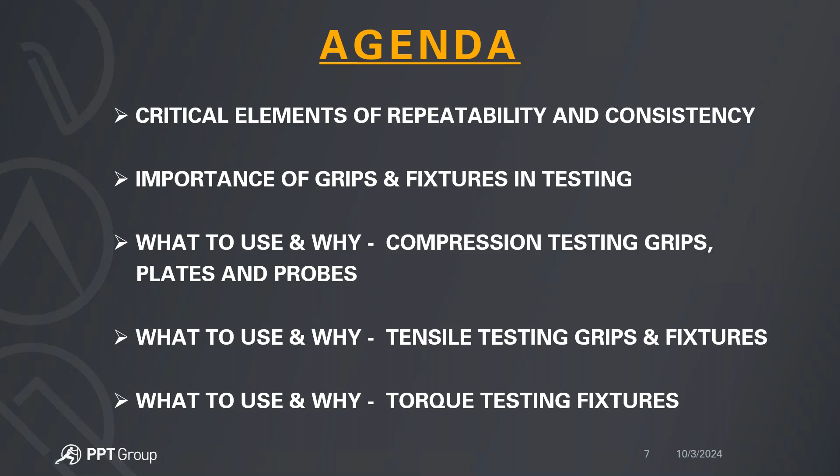So our agenda for today will be quite simple. We'll look at some of the critical elements of repeatability and consistency. We know the selection of grips and fixtures play a crucial role in establishing a consistent and repeatable testing environment, so we'll look at what some of those elements are. And then obviously the importance of grips and fixtures in testing in general. And then we'll hone in on what to use and why for compression, for tensile, and for torque testing.

So the key factors that are usually required for any consistent and repeatable testing environment are obviously defining a testing objective. As in, why are you even testing a product at all? What are you looking for? Obviously, without a destination, you're not going anywhere, right? So we need an objective, why that test is being performed. And then establishing a testing standard requirement, or how do you go about meeting that objective?

So let's just say we're looking for the compressive strength of a container. We've defined the objective. How do we go about compressing that? Is there an existing ASTM or ISO standard that gives you a guide on the types of fixtures to use, sample preparation, the testing environment, the speed of the test, what kind of data to include in the calculations, and so on? Or is it just an in-house standard where you're establishing your own testing parameters? And then once those questions are answered, the next step is to determine the appropriate testing equipment to use.

Are we using a handheld unit? Is it going to be a simple motorized unit, or a computer controlled unit? Depending on the sophistication of the testing application, you can determine what type of equipment to use. Other factors that go into that selection are how much force is being applied in the test, how much elongation is expected, and things like that.

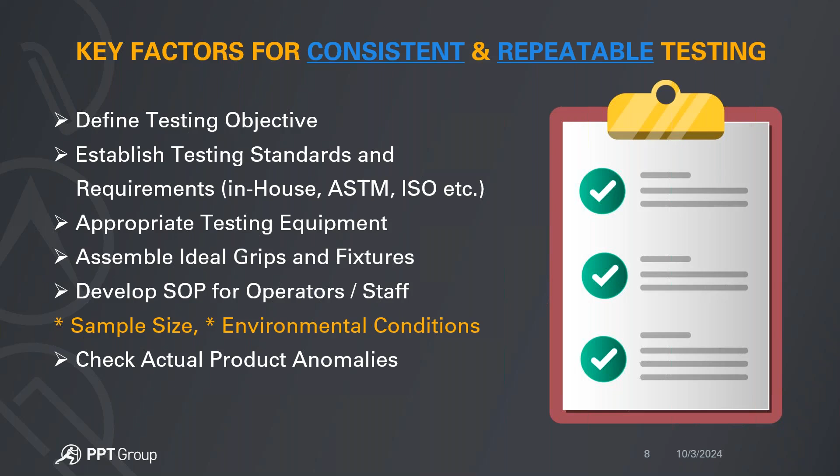So in all of these, as I said, any one of these can be its own webinar, but we'll focus primarily on number 4, which is the ideal grips and fixtures and how important they are to establishing a consistent and repeatable testing environment. So how important are these fixtures and grips to your testing, whether it's compression testing, tensile testing, or torque testing?

So we'll start with accuracy. The right grips and fixtures can minimize variations and inaccuracies in your testing measurements. For example, if you have a 6-inch wide sample, it wouldn't make sense using a 4-inch wide grip to grip it, because you have the overhang, which might affect the actual accuracy in your testing. Or if you're testing film and you're gripping it with serrated jaws, those jaws might bite into the film, and so the tear or the break happens at the point of contact, not necessarily in the middle where you expect it to be.

So again, selecting the ideal grips is critically important. And once you find the right grip, you're enhancing the repeatability. If it's the right grip, then as long as the operators are fixturing the samples the exact same way, you should see some consistency in the test results, as in the test being repeatable. Gripping the sample correctly is essential for test repeatability.

Ease of use is a factor we usually don't really consider. We don't want the operator with the biggest forearms to be the only one able to fixture a certain sample correctly. We want the ideal grip to lend itself to ease of use, regardless of who the operator is. Again, it's all in the SOPs; if everyone's doing the exact same thing at all times, then we shouldn't have one operator over-tightening and another under-tightening. If that is a problem, you probably should go with a lever-operated or pneumatic style grip, which will ensure all operators are fixturing those grips the exact same way.

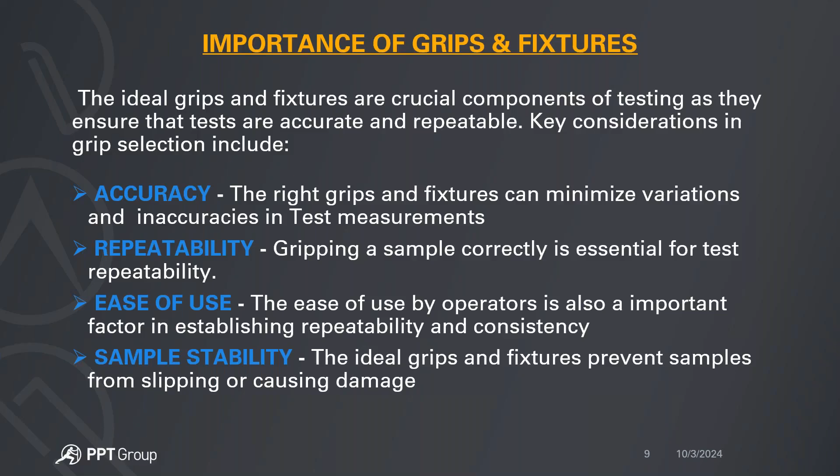So these are the important factors that go into the role that grips and fixtures play in your testing application. We'll take a quick look at some of the commonly used grips and fixtures in compression testing. As I mentioned previously, these usually warrant a whole webinar on their own, where we delve into the types of compressive testing and what to use and why. But this is going to be more of a cursory, general, introductory look.

Compression or push testing usually can be either destructive or non-destructive testing. It essentially measures force resistance when you compress to a known deflection or displacement.

So these are the three types of tests you usually see in a compressive test, where you compress to say 2 inches and then measure the maximum force resistance, or you can measure the deflection when a specific force is applied. So if you wanted to test a spring and know how much that spring deflected under say 20 pounds of load, that would be one of the objectives of a compression test.

Then there are other instances where you can just run until the sample breaks or fails, and measure one or both of two things: either the force at break or the deflection at break, or both. So you're measuring the sample's yield or point of deformation or failure, in addition to break and/or deflection.

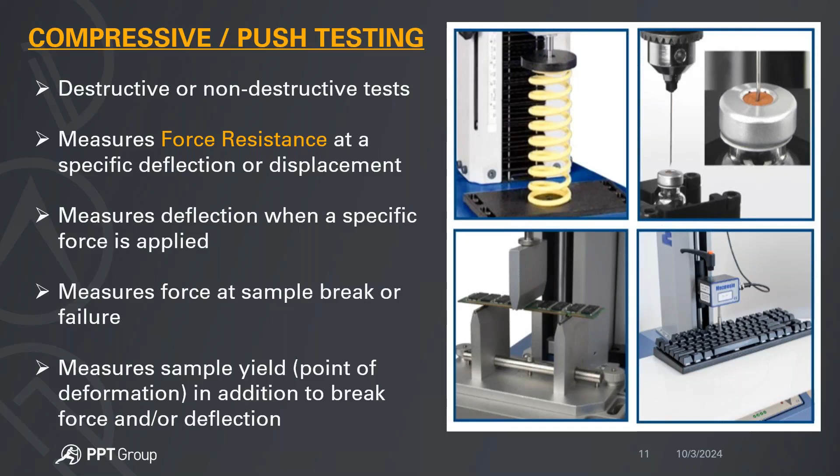So what are some of the grips and fixtures used in these applications? We'll start first and foremost with typical top load or crush testing. These involve compression plates, or you might hear the term platen used every now and then. These come in different sizes and materials, and can be round, square, or rectangular depending on the type of samples being compressed. They can also be rubber-faced.

Rubber-faced compression plates prevent slippage, especially when you're compressing really smooth samples, because anytime that plate slips, it might create a certain anomaly in the test result, which is undesired.

You can also have self-leveling or cone-pointed types of compression plates. Self-leveling is kind of self-explanatory - if you have uneven surfaces, a self-leveling compression plate is usually ideal. The cone point is if you have samples where you need that cone to enter the opening of the container and also let air out so you're not building up pressure in that bottle. That would be ideal as well.

Some of the test applications you might see using round, square, rectangular, vented or non-vented compression platens would be top load testing. You'd find top load testing in blow molding or other containers, whether it's aluminum containers, cans, plastics, and so on. Also burst or break testing, and push out testing - these are all the common applications where you would essentially identify these types of compression plates.

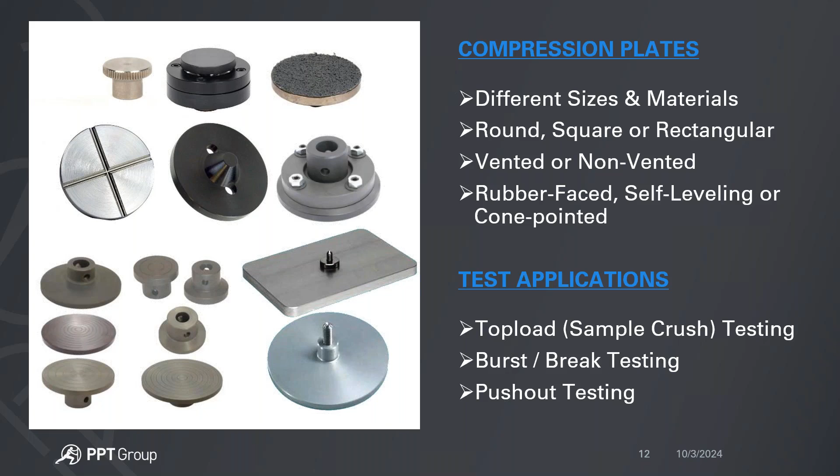There are also compression probes that are more specific, for when you want to pinpoint specific areas instead of compressing general areas. For general areas, that's when you would use a plate. The probes perform a similar role, but slightly different.

Imagine if you had to test the keys on a computer keyboard - a compression plate might be touching several keys at once. So using one of these more dedicated probes would allow you to concentrate on just one key at a time.

Or if you had to do a needle puncture test, if you had to puncture leather, rubber, or textile, then a sharp tip probe would be more ideal for that testing application. If you had to do a burst test through plastic or paper, then the radius or round ball probes would also be more ideal.

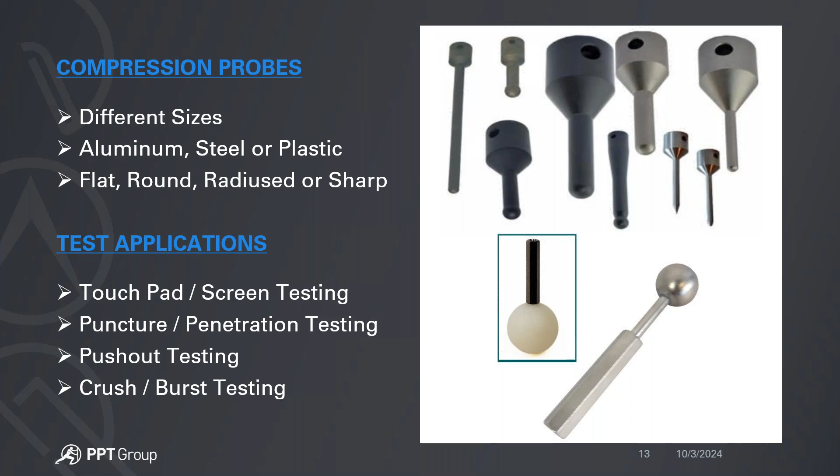Next, there are also certain custom applications. These are usually not simply off the shelf, but customized to meet specific testing standards, or maybe just because of the sample size, simply hanging a compression plate on a load cell might be a little too much.

You can have round, square, or rectangular fixtures. You could also have static ones, meaning more dedicated, and quick change adapters that allow you to change between fixtures relatively quickly. If you had different sizes of boxes to test, you could keep the same base plate and change the top sizes. Custom test applications include carton crush testing, glass break testing, and touch actuation testing.

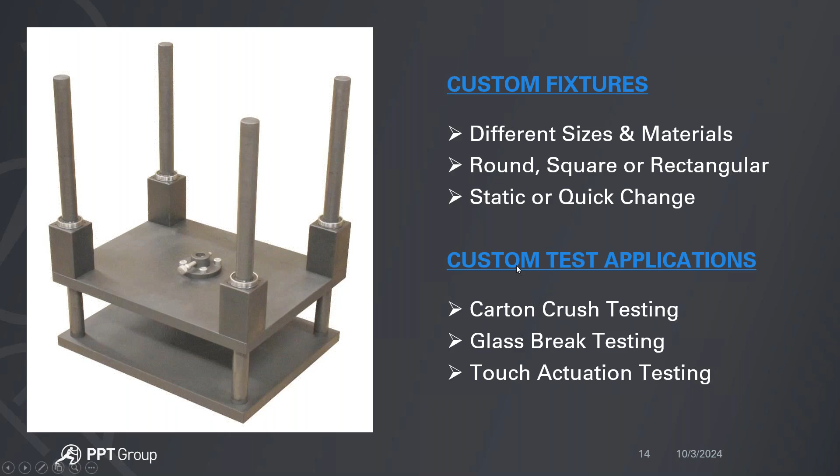All right, so types of grips and fixtures in tensile or pull testing. This is a whole webinar on its own, but we'll look at some factors or features of tensile testing. These can be destructive or non-destructive testing that measures forces at a specific displacement, or measures displacement or deflection when a specific force is applied, and also measures the force when the sample fails or breaks, or the point of deformation.

In certain force testing applications, running to a tensile displacement and measuring the force is common, or applying a specific tensile load and then measuring the stretch. But when testing materials, there are usually additional calculations like the yield point of deformation, elongation, and other calculations like Poisson's ratio or modulus of elasticity. Regardless of the testing application requirements, whether an in-house standard, ASTM standard, or ISO standard, the grips and fixtures will always be pretty much the same.

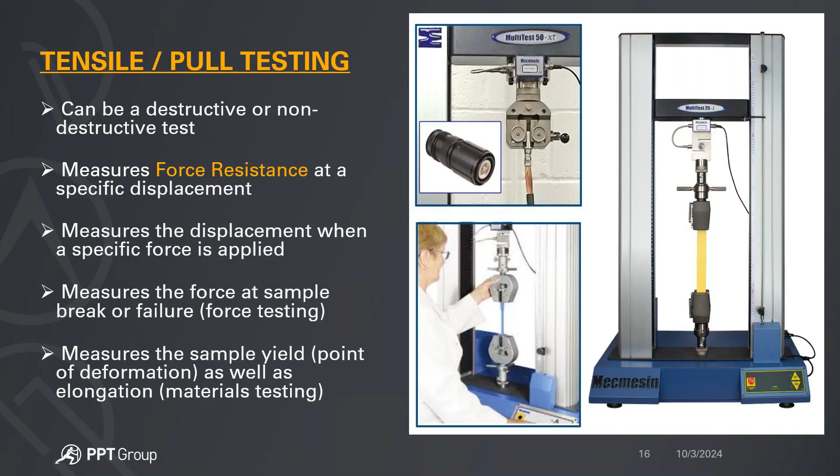So a quick look at some grips and fixtures. The most commonly used grips and fixtures in tensile testing are wedge grips. What's the allure of wedge grips? The grips are lever operated or capstan operated, but they're mostly spring loaded, and the jaws tighten as you pull on the sample. This addresses one of the important factors of grip selection, which is preventing the sample from slipping as you apply any kind of load, in this case tensile load.

So lever operated, spring loaded, or wedge grips are commonly used, or the capstan, where you have that wheel turn, is also commonly used, especially in tensile applications that require slightly higher rates of force.

Now these come in different sizes and capacities, depending on a few things: what the sample width and thickness is, as well as how much force is required in the testing application. These can be aluminum or steel, and one added advantage is you can have multiple jaw faces depending on the sample material - is it leather, rubber, textile, metal, soft aluminum, paper, or film?

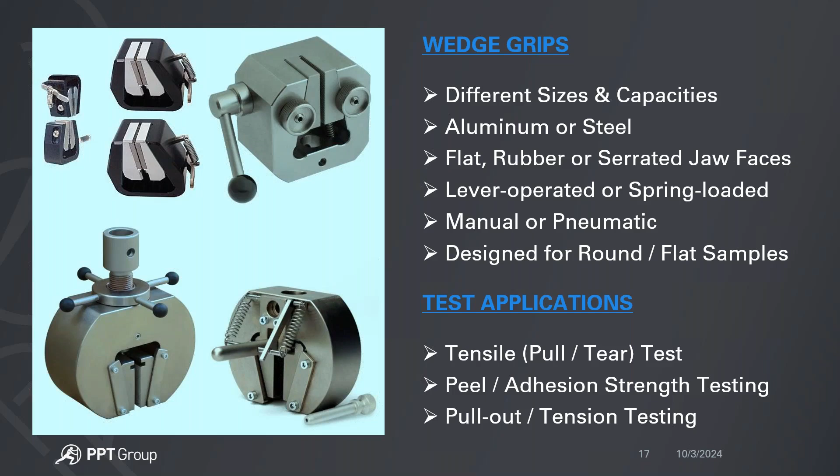Anything more than that, if you had to test a sample that's about 4 to 6 inches wide, then you might want to be looking at Vise grips. Vise grips also come in different sizes and capacities depending on the application requirements and the type of product you're testing. Again, they can be aluminum or steel.

Are you testing flat, using rubber faces, serrated faces, or even wave faces? Imagine if you had to test a piece of textile or fabric. There are these wavy kind of jaws that interlink, so when you put your fabric in it, it interlocks the fabric and concentrates the breaking force to the middle, which is where you want it to be. These can be used for both narrow and wide samples, and I've seen samples go as far as 8 inches in width, which is something that wedge grips cannot accommodate.

You can also find Vise grips in either manually operated lever or dual screw, or they can be pneumatic, as in air controlled, especially where you need to really clamp these products and prevent them from slipping while under load. Vise grips are designed for both round and flat samples. Samples can be rigid or soft, but those will essentially determine the types of jaw faces you use in that testing application.

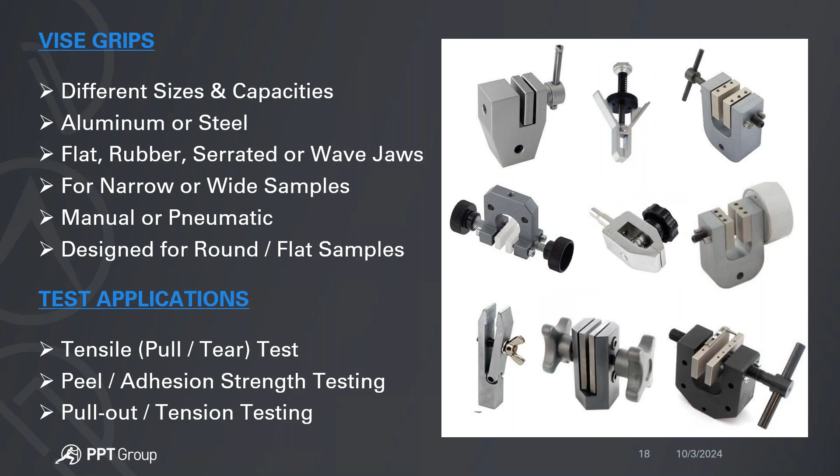Typical testing applications will also be tensile, pull or tear tests, peel and adhesion strength testing, pull out testing, shear testing, tensile shear testing, and so on.

There are other common tensile testing fixtures, things like test hooks that are very simple. If you bought a simple force gauge, more than likely in that carrying case you would have a simple test hook used for very simple pulling applications. Or you might have a flip cap hook, used on any products in your refrigerator with a flip cap. We call that a flip cap accessory or flip cap hook, used in testing the strength it takes to flip the cap to open and access a beverage, sauce, dressing, or what have you. And then there are cam grips, also used in different types of tensile testing.

There are bollard grips. Bollard grips are super cool, especially in yarn, rope, or wire testing, where they allow you to essentially wrap the wire around the bollard, which transfers the energy to the center, because you don't want the wires breaking at the point of contact where the jaws touch it. By wrapping it around the bollard, you transfer the energy to the center or middle of the sample, so it breaks right in the middle.

Then there are these crimp receptacles used in crimp strength testing on cables and wires. You could essentially have, on one grip, different sizes of cables, anywhere from 28 gauge down to 6 gauge, where you just rotate the center to get the right slot to accommodate the wire, in order to concentrate all the force on the actual crimp removal and not on the wire itself.

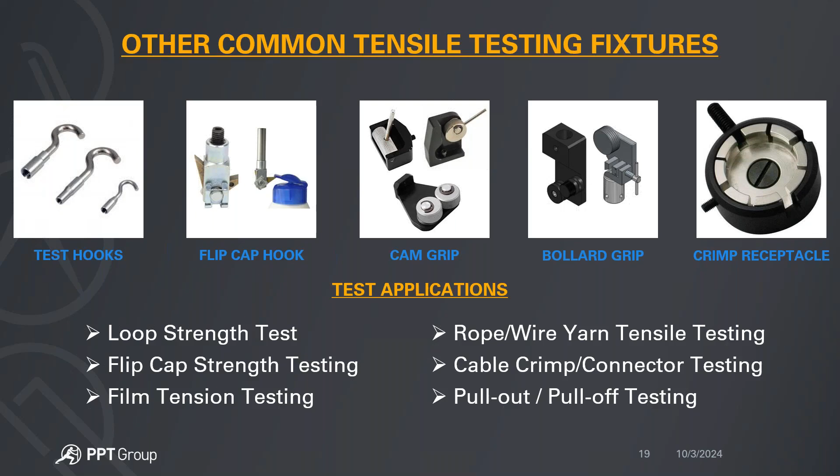It's one of the super fancy, cool fixtures we have. Think of a teddy bear eye on a plush toy or stuffed animal - one of the tests we perform is to see how strongly sewn on the eyes are on those plush animals. Essentially, to grip that simulates a child putting that button or eye in their mouth, and then testing the strength to make sure it doesn't become a choking hazard - so it's sewn on strong enough. By using this multi-jaw grip, it essentially forms around the button or the eye, and if you tighten that, it will grip it as if simulating gripping it between your upper and lower front teeth, and then pulling on that.

And then for applications that require really low or minimal force, or in instances where it's such a unique application that nothing off the shelf actually meets the requirement, we're able to generate 3D printed parts. One of the advantages of a 3D printed part is if it's a really low force testing application, you don't want to put a hunk of a grip or fixture on there, which exerts too much force on the load cell. So a 3D printed part allows you to use lighter material while still not deviating from the accuracy of the testing application.

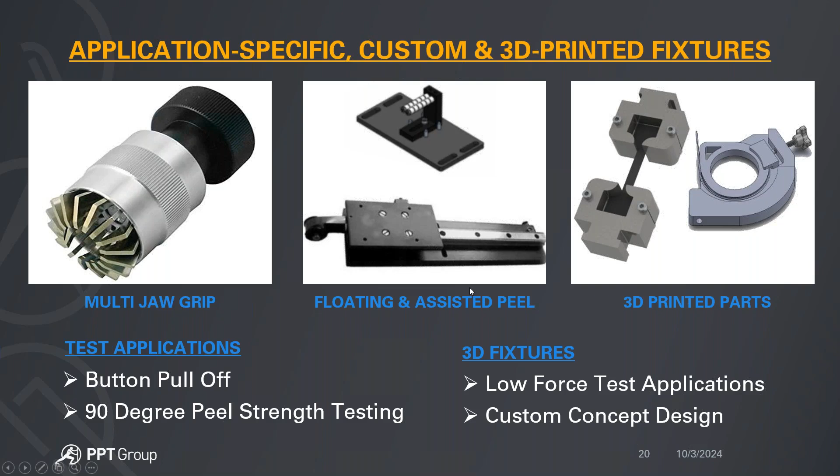So they're 3D printed parts, either for low force applications or for custom applications for which there's nothing off the shelf that actually meets the standards, or for really sophisticated custom concept designs and so on. So I know sometimes we encounter, hey, look, when I was going through your grips and accessories here, this is the product we're testing, and I can't seem to find any grip or fixture that meets that. Not to worry, we always do custom grips and fixtures all the time. So these are some of the different types of tensile testing fixtures that you would encounter.

Our next part here is our closure torque testing. Now, every time I use the word closure torque, or anytime our industry mentions torque, I know if you're a car enthusiast, the first thing that comes to mind is torque, like vehicle torque. So I'm going to disabuse your mind of that.

So for us, torque is essentially going to be either a static or reaction torque. And it comes with anything that turns, whether you're turning it clockwise or counterclockwise. Static torque, as in how much torque it takes to remove a cap off of your bottle, or reaction torque, how much torque resistance there is in spinning a fan, and so on.

Now, the different torque types that you would see would be a static or reaction torque, which involves a slow rotational rate of speed. For instance, the amount of torque it takes to turn your wipers on using the switch mounted on your steering column. Whereas the rotational or rotary or dynamic torque involves the motor that actually controls the wipers, or your roll-up windows, or your fan and so on, which would be more a faster continuous rotational rate of speed.

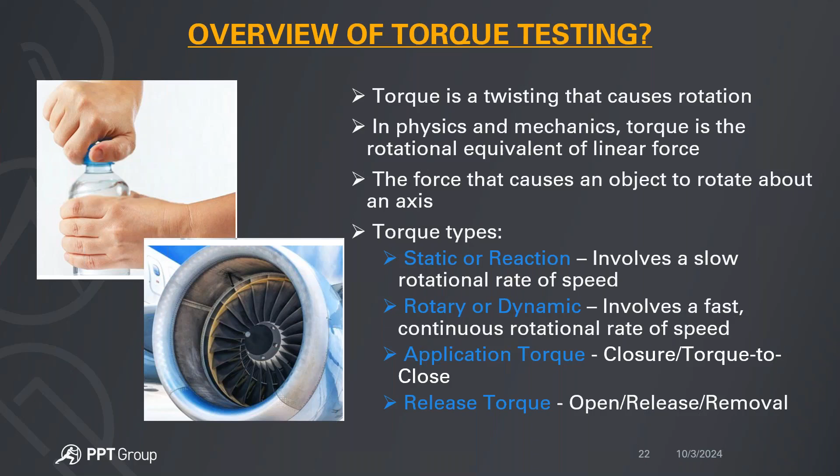And then most torque is measured either as application torque, closure or torque to close, or open, release, or removal torque. So these are the types of torque that we usually reference when we're talking about torque testing, and not necessarily vehicle torque, right? Like your Mustang having this much torque and so on.

Remember, one of the factors that enhance a repeatable and consistent testing environment is making sure operators are all doing the exact same thing at all times. So using that saddle plate ensures none of the products are hanging more than the others. If all operators are required to have the sample sit flat before testing, that saddle plate comes into play.

So you bring them closer if your sample size is smaller, and open them wider if your sample size is wider. The advantage of these types of fixtures is they accommodate round, square, hex, or non-symmetric samples. These are essentially silicone-plated pegs, again to address that important factor of preventing the sample from sliding or slipping while under torque, whether clockwise or counterclockwise.

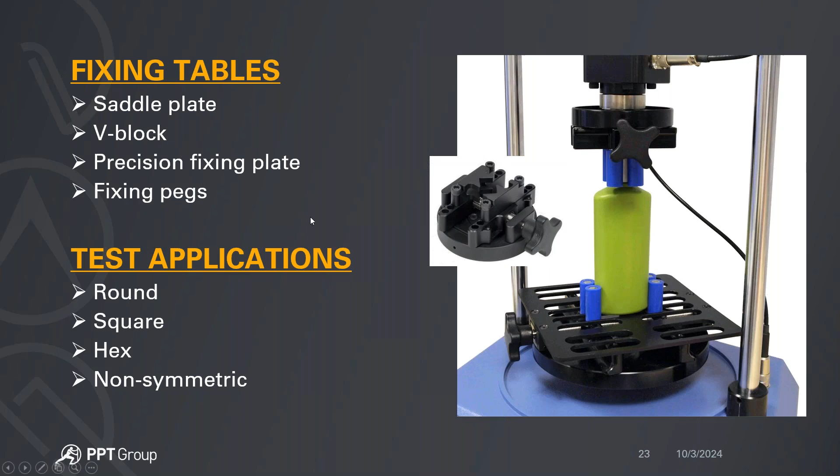Other types of fixtures you might encounter would be closure chucks and mandrels. One of the disadvantages of using the pegs, as we've alluded to, is it requires tightening where you turn the knob to tighten those pegs around the top and bottom. Depending on how big or strong your operator is, everyone has their own concept of how tightly they're actually tightening. If you over tighten, you might create an instance where it requires more torque to release the cap.

And if you under tighten, the sample might slip. So those are instances where you'd rather opt for chucks and mandrels formed specifically for the cap, especially when testing serrated caps. We can mold or form these in circular or split, aluminum, plastic, or steel mandrels to fit those specific caps. If you took your regular soda bottle out of the refrigerator, you'd see the serrations on the cap—we can form a mandrel to fit that specifically.

The added advantage is that chuck—anytime you lower it onto the cap, it fits perfectly, which means all operators, regardless of how big their muscles are, can essentially fixture the sample the exact same way every single time. In cases where the caps are smooth, we have that split mandrel.

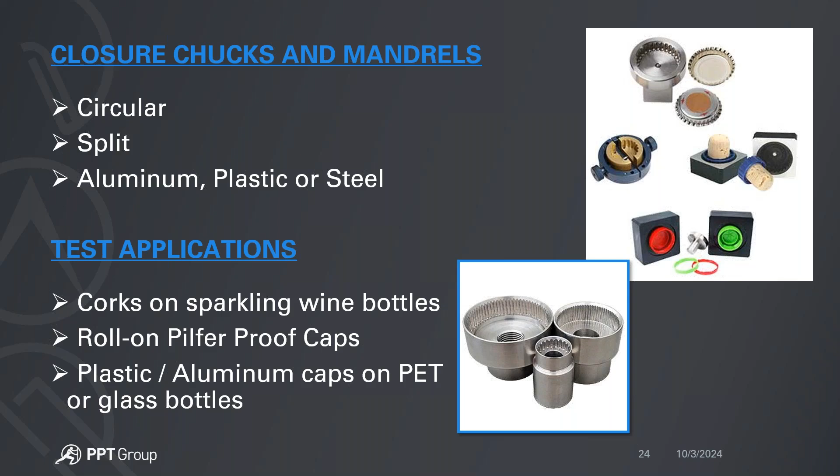Now, every time we've talked about torque testing in our industry, once we separate from vehicle torque, the next question becomes: do you only test torque on containers? No, not at all. If you think of anything that can twist—things like catheters, automotive knobs, electronic knobs, large mason jars, torque screwdrivers, wiper controls—or the antennas on the back of your vehicle, it takes a certain amount of torque to screw it into the base. Those are all different types of samples we'd test in typical torque testing applications.

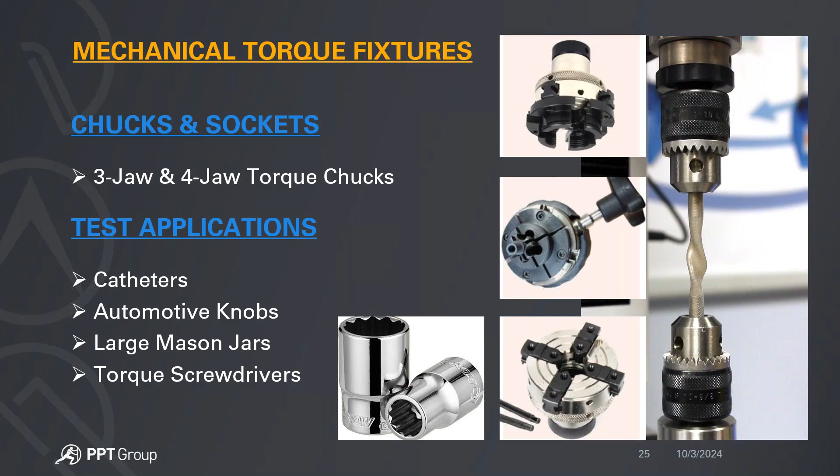For those, the kinds of fixtures you'd see are 3-jaw and 4-jaw chucks formed specifically around those samples. You'd also see typical sockets used—3/8 or 1/2 inch or different sizes, whether metric or standard—that form around the type of sample being tested. These are usually ideal when performing verification tests for torque screwdrivers or torque wrenches. Typical testing applications would be in the electronics industry, automotive, and so on—these are all types of torque testing fixtures you'd encounter in any torque testing application.

That essentially completes our discussion of the common fixtures usually used in compression, tensile, and torque testing. As I mentioned before, today's presentation is more of an essentials or fundamentals overview. In the future, we'll do more comprehensive webinars that delve into the different types of testing applications you'd find in compression testing—things like burst, compressive, top load, puncture, needle insertion, and so on. In tensile testing, for peel and adhesion testing, whether 180-degree or 90-degree, and also for torque testing, we'll look at closure and release torque depending on the types of samples.